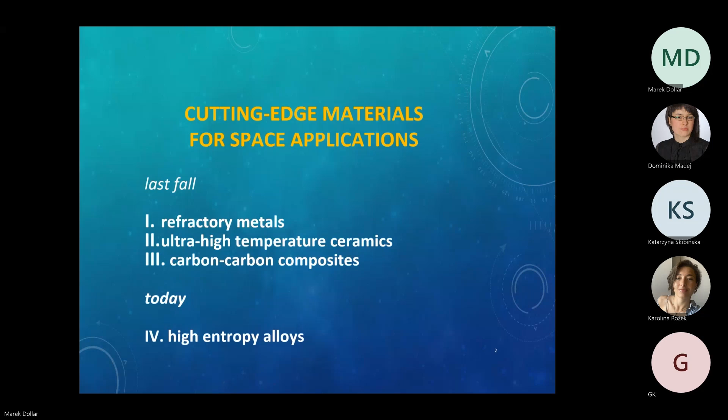Whenever we have discussion on materials, particularly load-bearing materials for structural applications, so structural materials, in the context of aerospace and strictly space applications, we always have to remind ourselves of the king of the field. These are so-called nickel-based superalloys.

It is really a gold standard of aerospace, not just space, of aerospace materials, without which we wouldn't have jet engines. There is no other class of materials that could compete today in major applications for jet engines, for rocket engines. Actually, we wouldn't be in space, literally.

The very well established class of materials, optimized over the last 4 decades, is a baseline for our consideration of materials that are needed, because even nickel-based superalloys. This is the only class of alloys that we call superalloys. So again, it's a baseline for the consideration. All other materials have been designed, or are being designed with the demands in space.

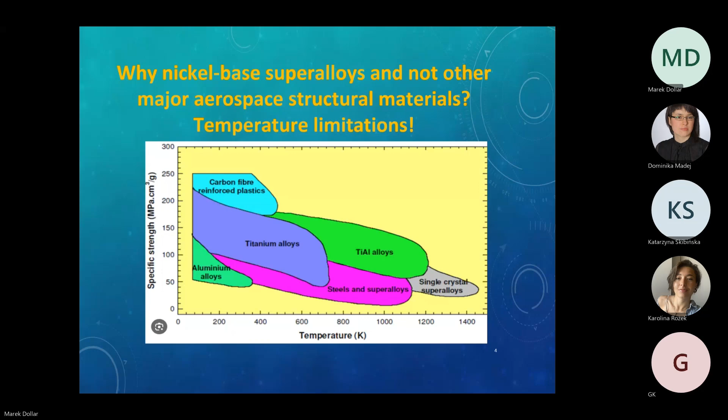Just one slide. I mentioned 1100 degrees C. Nickel-based superalloys in their single crystalline form offer you excellent behavior in the elastic region, so material stiffness, and in plastic deformation, they're strong and ductile. That's the combination that we need for structural materials.

Also, the oxidation resistance is good, and they have particularly excellent creep resistance, which is of major concern. But also the fracture toughness is great, and fatigue resistance is good. So again, this is the starting point. This is what we need at 1100 degrees C. But last fall, I already talked about the three categories I listed at the beginning. Refractory metals, ultra-high temperature ceramics.

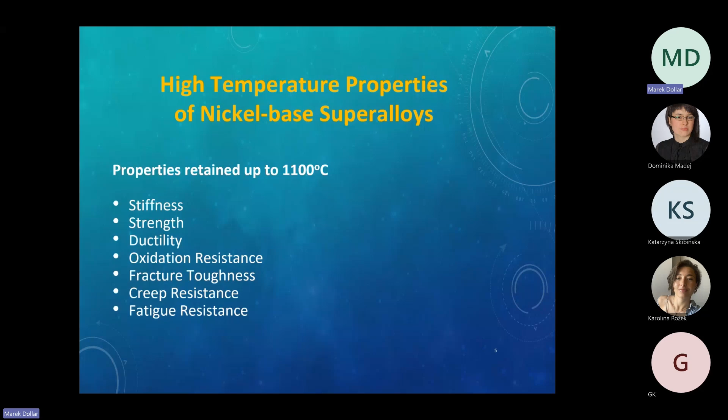These are the classes of materials that are either already helping or will be helping in the future. So keep these properties in mind, and the temperature, as an introduction to high entropy alloys.

Now, looking at high entropy alloys, I will be talking about their composition, about atomic structure, but very briefly. I really will focus on core effects related to high entropy alloys. And I will point to differences between, let's call them conventional alloys and compositionally complex alloys, and high entropy alloys are compositionally complex.

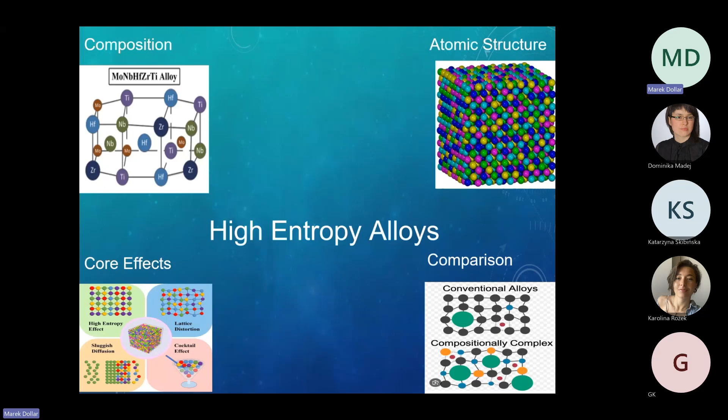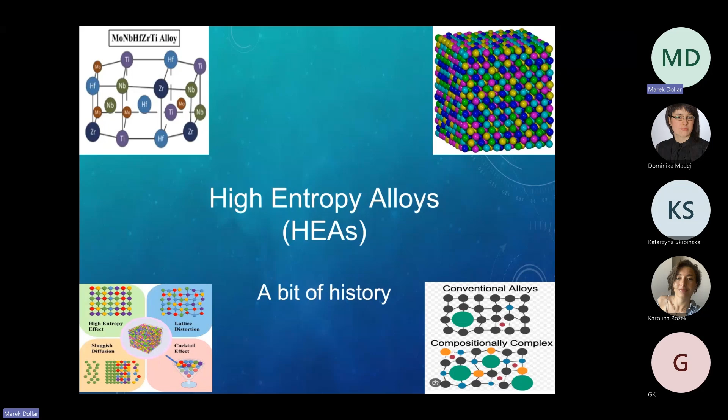Typically, we don't talk about history of alloys, but I think it's worth it in this case, because it's such a unique class of materials, and the way it was developed, for me, is fascinating. So let's start with this aspect, very briefly.

Until I would say 2005, so practically, let's call it 20th century alloys, the well-established alloys we are using today successfully, what dominated was what we sometimes refer to as a one-element paradigm. Altogether, materials designers, people responsible for material selection, material scientists, the bottom line, as far as alloys were concerned, was a simple rule that there is always one dominant element.

For example, iron, nickel, aluminum, and the list goes on, some 20 different elements. Then what you do, you start with a pure metal and add relatively small additions of other elements. Because an alloy, by definition, is a combination of a basic element plus some other additional elements.

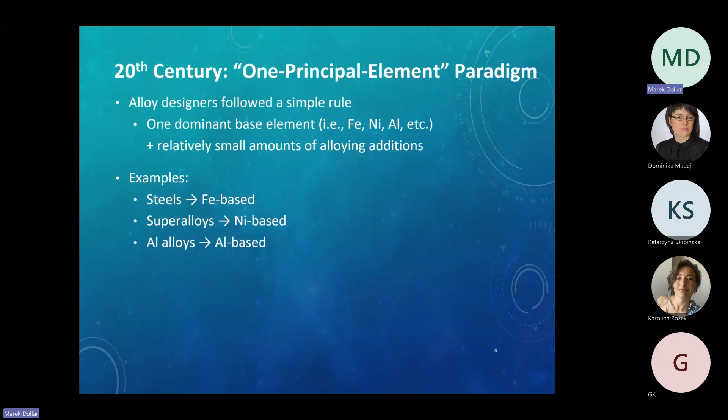A few examples: steels. Steels are alloys of iron and carbon, but of course there are tens of thousands of steels with very different chemical compositions. I mentioned nickel-based superalloys. They are based on nickel, the dominant element. This is the one-element paradigm. Aluminum alloys, yet another example.

And interestingly, I call it the unchallenged implicit assumption. I was at that time part of the game. I never really thought seriously about taking a few elements in nearly equal numbers. It's not that it wouldn't cross our minds, researchers in the field, but we knew it wouldn't work.

No further considerations. Why? Because based on the experience we had, and we still have, when you add elements, very quickly you start reaching the point where the stability of the solid solution structure is a challenge, where inevitably, with a few exceptions, I may mention one of those later on, we produce brittle phases, they precipitate.

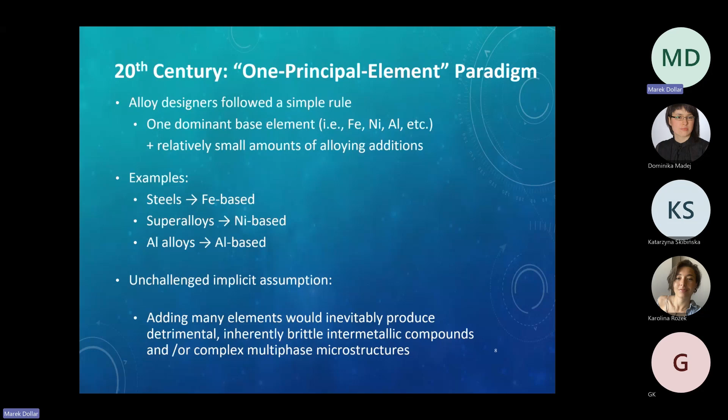So these are particles. And as far as strength is concerned, this is typically a plus. But adding brittle particles, intermetallic compounds, for example, such as nickel aluminum, titanium aluminum, very well-known classes, impacts ductility. And inevitably, the concern is the balance of strength and ductility. That's why pretty much no one talked about multi-element alloys, true multi-element alloys.

This was, in a sense, a breakthrough approach. But the concept behind this, I call it a breakthrough concept, is that these alloys, from a purely thermodynamic standpoint, have to have high mixing entropy. That we've known forever. That's nothing new. Simply the effort did not go in this direction, to truly explore what providing materials with high entropy of mixing atoms really means. From the thermodynamic standpoint, that's pretty obvious, not surprising, but how it impacts materials' properties.

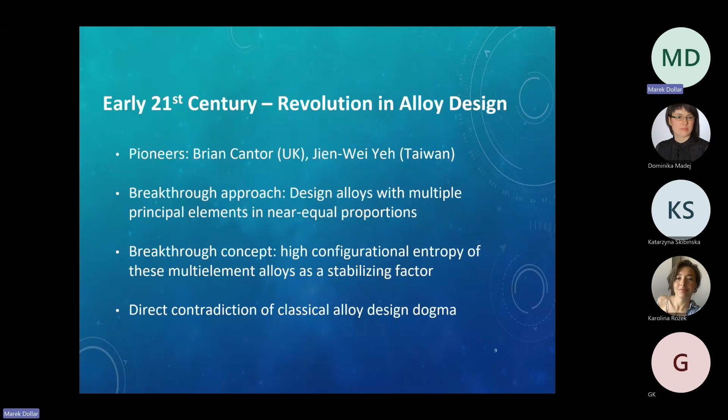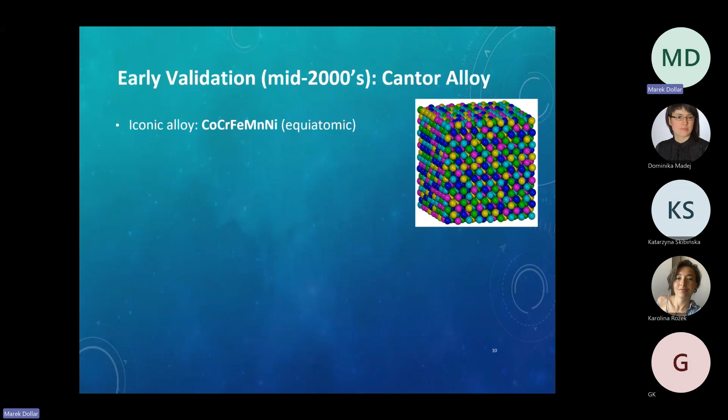It didn't take long. Cantor developed what's today called the Cantor alloy. It's an iconic alloy, if you will. Because whoever touches high entropy alloys, that's the starting point. What he did, he took 5 metallic elements, cobalt, chromium, iron, manganese, and nickel, in practically equiatomic proportions, 20 percent each.

And that's a nice illustration of what the structure of this alloy looks like. It's cubic, face-centered cubic, based on a cube. You see 5 different colors, from yellow to green to dark blue and so on.

Atoms are distributed randomly, but there is some pattern, if you will, because it's 20% of each. And very quickly, first mechanical studies proved that this Cantor alloy has a stable microstructure from temperatures as low as liquid nitrogen temperature to 800, 900 degrees C. That was very interesting, because there is no brittle to ductile transition. Actually, they were looked at as a very promising cryogenic alloy, not as much a high temperature alloy.

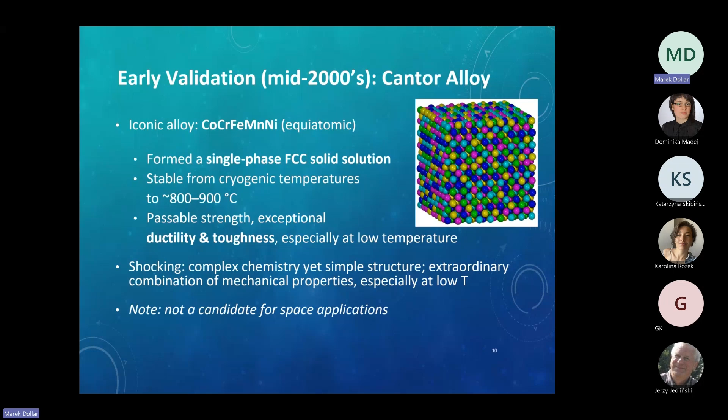Again, no mention of space. This alloy wouldn't even be considered for a second as a space material, because practically above 800, 900 degrees, we wouldn't have any use for this particular high entropy alloy.

Very quickly, around 2010, there was already, and that's fascinating, a pretty good understanding of core effects. Four core effects: high entropy effect, lattice distortion, very slow, sluggish diffusion, and what people refer to as cocktail effects. So a combination of several factors impacting properties.

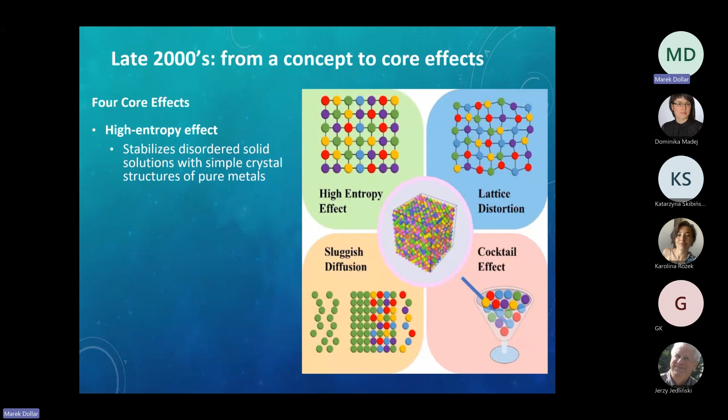Now, high entropy effect. The high entropy of mixing resulting from the presence of 5 major elements stabilizes what we call disordered solid solutions. I will show you an example in just a moment, with very simple crystal structure, equivalent to single metal structures or pure metal structures.

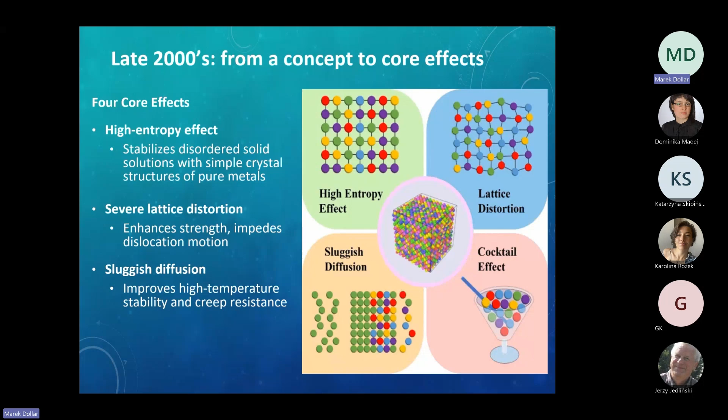By having elements with different atomic sizes, we have severe lattice distortions. There is an enhancement of strength, but at the same time, it slows down dislocation motion, which is responsible for plasticity, for ductility. Sluggish diffusion: because of different sizes, vacancies, or atoms, you can use the terminology in parallel, move much slower than in conventional alloys.

And this is huge because creep, if there is the biggest concern for high temperature applications, it is the creep resistance of the alloys. And the sluggish diffusion contributes to this. Cocktail effect: there are some first studies related to this effect, but the point is it's kind of a non-linear enhancement of properties.

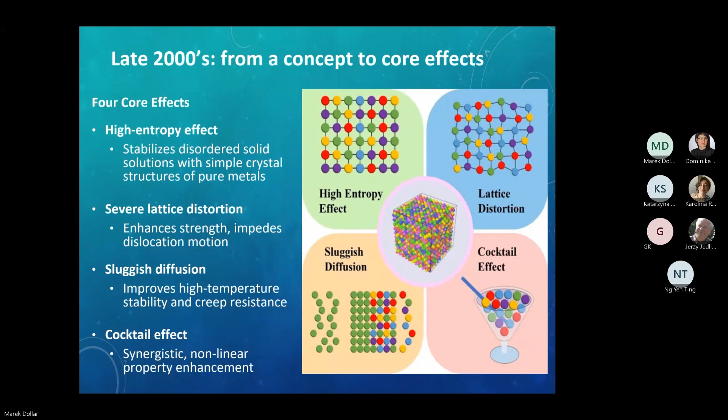I mentioned the crystal structures. We have 14 Bravais lattices; metals crystallize in the simplest lattices: body centered cubic, atoms at the corners and 1 atom inside; face centered cubic, atoms at the corners and atoms at the center of the faces; and hexagonal. When you see the list of alloys, there are like a dozen or so. These are the bases for practically all structural alloys in use. They're all the usual suspects when you look at the list of elements.

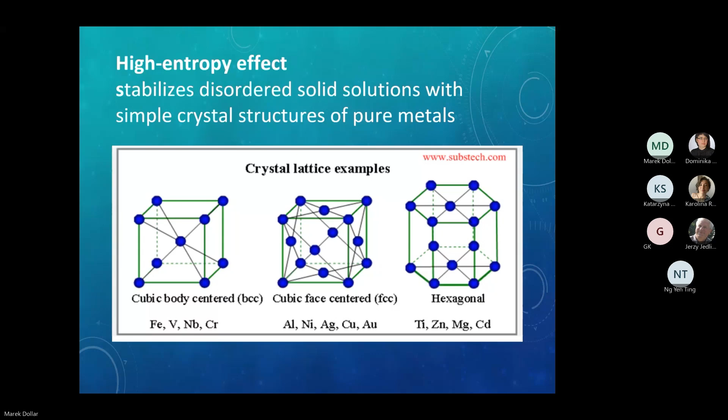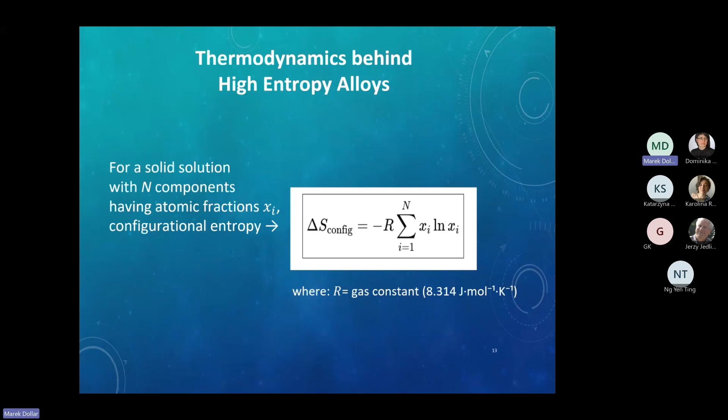Now, just 2 slides. Thermodynamics behind high entropy alloys. You have n components; in the Cantor alloy's case, it is 5. All of them have sometimes different, sometimes the same atomic fractions. You calculate the configurational entropy, finding the products of the 2 terms, summing them up from 1 to n, multiplying by the universal gas constant with the minus sign. In an equiatomic alloy, for example the Cantor alloy, 20% of each element, xi equals 1 over n, n is 5, so 1/5. And you get the entropy of mixing from this simple equation.

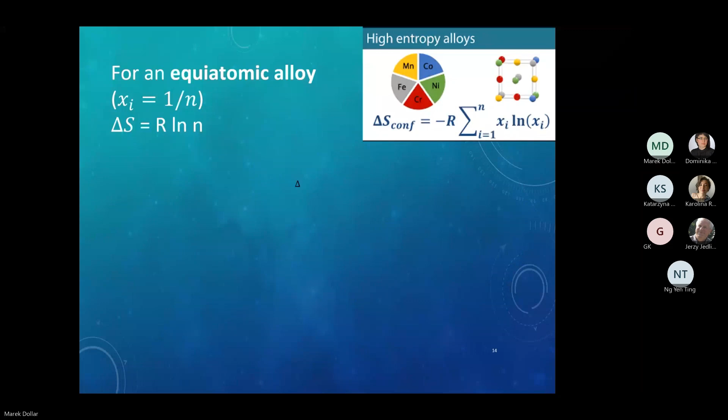Now, how does the number of elements impact entropy of mixing? By definition, in a pure metal, there is no entropy of mixing. We are not mixing atoms of the same substance. For 2, it increases to close to 6 joules per mole times Kelvin, and it goes up. A typical high entropy alloy has entropy in the range of 10 to 20, let's say, but that's calculated based on the assumption that the number is exactly the same.

And this is what we are talking about: 5 elements, practically all. There are some 4-element high entropy alloys, but for practically all, we have 5 elements. This entropy of mixing is high enough to secure what we expect of high entropy alloys.

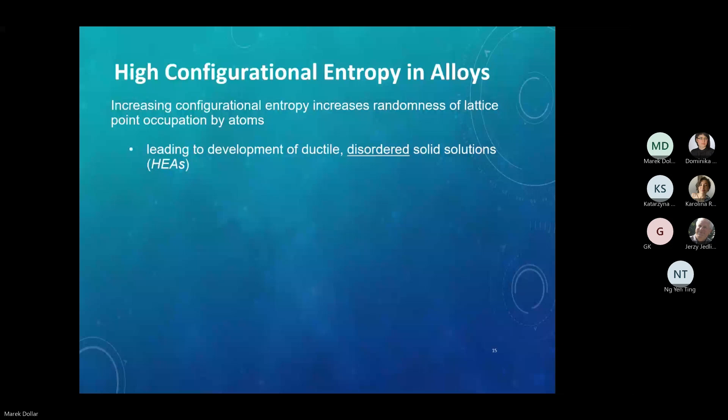Now, when you mix atoms, you increase the randomness of lattice points occupied by different atoms. That's where the entropy comes from. And altogether, under these circumstances, we produce very ductile, disordered solid solutions. That's the illustration. You have just 2, in this case, red and black atoms. And this is a disordered structure, so there is a random distribution of atoms in individual lattice points.

Here you can see some order. This is actually, for 2 elements, intermetallic compounds, yet another interesting class of materials, but I don't have time to talk about it. It was listed on my mega plot; I showed titanium aluminides. This is how the structure would look, but they are ordered. And ordering, in the case of structural applications of the type we're talking about, is disadvantageous.

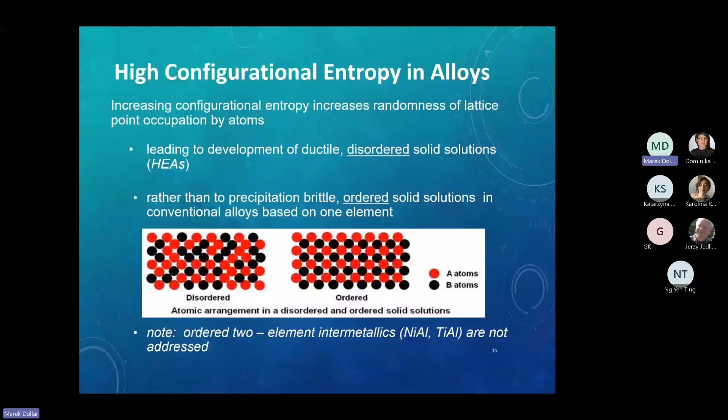Yeah, I just mentioned that nickel aluminum and titanium aluminum is not something we would be concerned about today. Now, going back to the free energy of mixing, look at this product. We have 2 ways of minimizing energy, which of course is an inevitable nature intention, if you will. You can do the following things to increase entropy, which minimizes energy. Either you increase the configurational delta S, or you increase temperature.

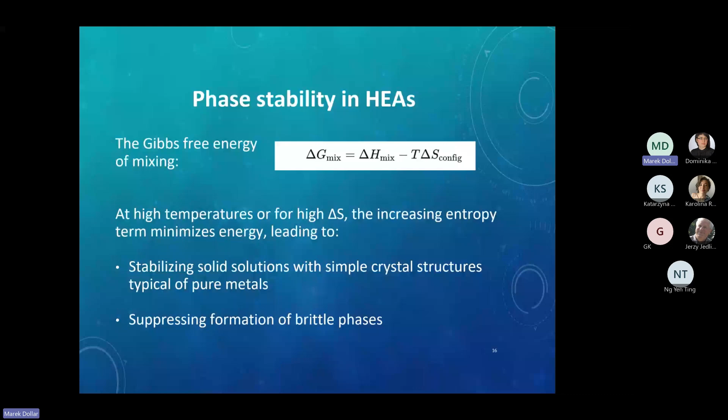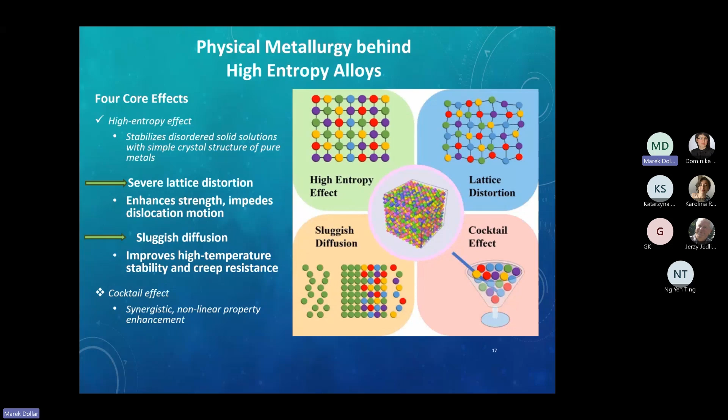Lattice distortion. That's the simplest. That's a body centered cubic structure in the presence of 1 type of atom. But here you see 5 types of atoms of different sizes. Immediately you see that the cube, the ideal cube, is completely distorted. And this is an idealization, because the distortions are sometimes, because of the atomic size differences, even more so than here.

What kind of impact does it have on motion of dislocation, this line defect? When millions of dislocations move, a phenomenon of so-called slip takes place, leading to significant plastic deformation. That's, of course, an oversimplification, but I can't spend any more time talking about this. And as a result, what we refer to as the energy landscape changes tremendously. Because if we have one element, essentially, and this dislocation moves, it follows a sine function. It moves from one type of spaces to another in a way requiring very little energy. But that's not what we have here. With each additional element, the presence of the dislocation in proximity to these elements leads to strong local strain fields.

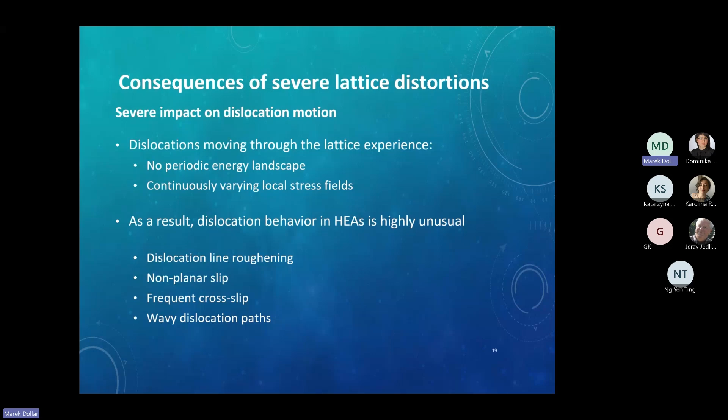That's incredibly complex. So again, on a lighter note, this illustration has so many mistakes that I won't even start. But imagine that this is a simple shape. It doesn't look like this, but it's an illustration. Now look at the dislocation line in high entropy alloy. There are several mistakes. I pushed GPT to apologize for these mistakes, but it didn't help much.

Okay, but you can see this periodic energy landscape in a single element. Dislocation moves and energy changes like this. But when dislocation moves in a multi-element, high entropy alloy, you see what happens. Very different amplitudes, if you will. Frequency is different as well. The bottom line is, I don't know what value this figure has for you, but at the very least it says everything we know in conventional alloys breaks apart in terms of dislocation motion. We don't know how to, of course, people do it. It's a new area.

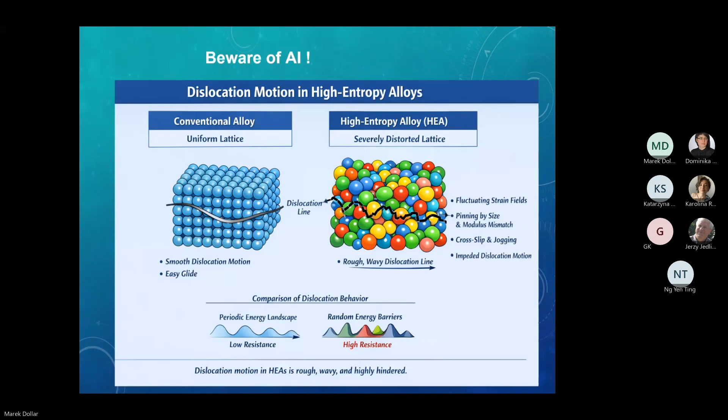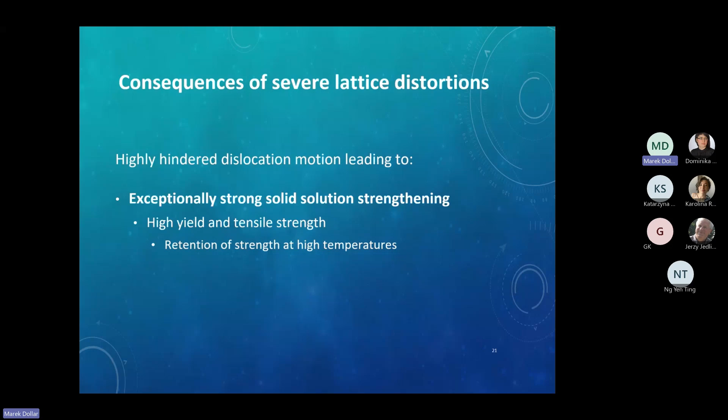What are the consequences of these lattice distortions? Dislocation motion is far more difficult, and we provide the stability of the solid solution structure. The solid solutions are strengthened. It leads to high yield and tensile strengths, but more importantly, as a prospective feature, the retention of strength at high temperature, provided the compositional structure is properly selected.

Why is the strengthening so pronounced? When you look at conventional alloys, let's say you have an alloy made out of black atoms. One of the ways of making them stronger is using so-called interstitial atoms, in between other atoms. That's why you call them interstitial, but also substitutional atoms, which means that we are substituting an original atom with another one. And these substitutional atoms can be bigger or smaller. Now, that's pretty much it. And it's an important strengthening mechanism.

But in compositionally complex alloys, we have a plethora of possibilities, because we have 5 types of atoms. And the position of interstitial atoms, the size differences are far more pronounced. That's why, from this standpoint, I look at this and say it has to be much stronger.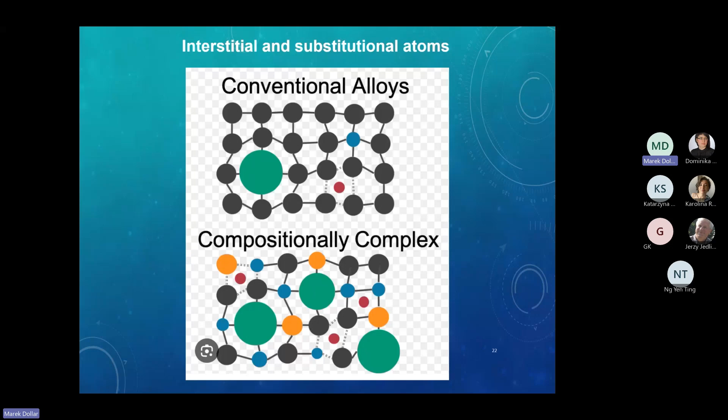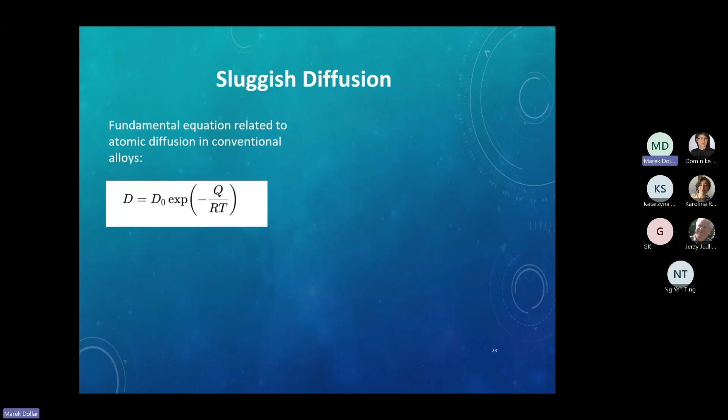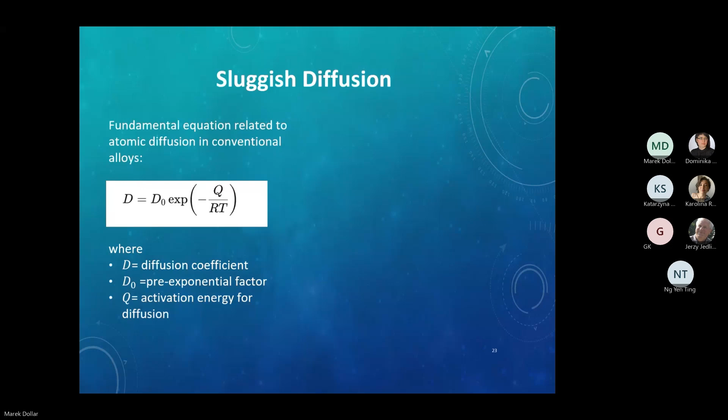Now, slow diffusion, very quickly. Look at the equation describing how fast vacancies or atoms move through vacant sites. That's a classical equation. Whenever we teach diffusion, that's where we start. D stands for diffusion coefficient, the material's property. D0 is a factor, different for different materials. Most important is the activation energy for diffusion, Q.

Now, why in high entropy alloys is atomic diffusion slowed down in a significant way? You look at this equation. In high entropy alloys, the activation energy for diffusion is much higher. If it is the case, we have lower diffusion coefficients D, and the diffusion coefficient is essentially the material's property that controls how fast vacancies diffuse. It relates to creep, again, arguably the most challenging aspect of structural applications in space.

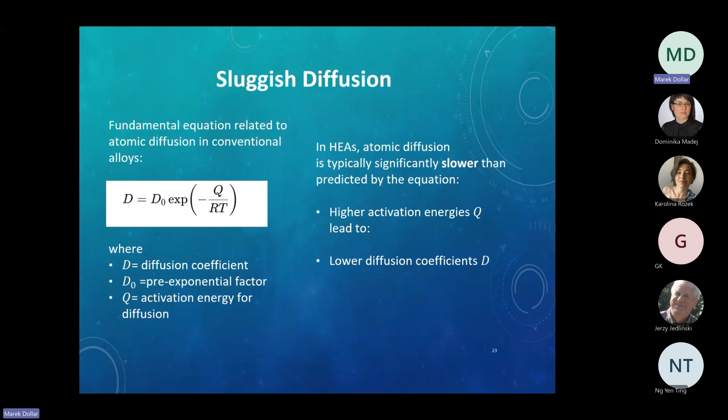The physics behind this: vacancy mobility. Vacancies moving is a theoretical concept. Empty spaces don't move; atoms move from one empty space in the crystal lattice. But we tend to talk about vacancy as a construct. They interact with 5 different types of elements. And the very existence of different elements introduces strain fields, changes them and the distance between differing atoms. That's a complicating factor. And the migration is slow.

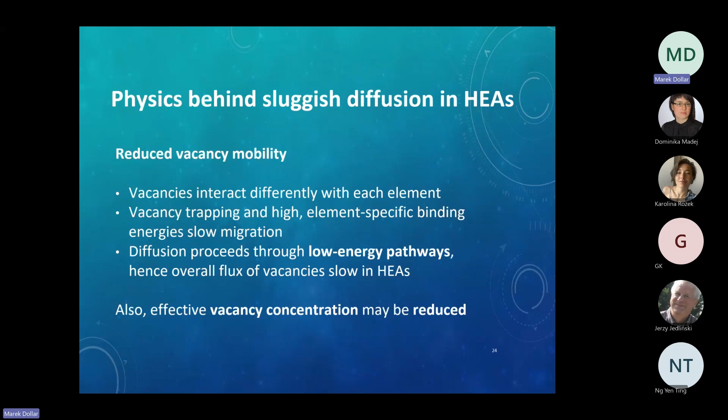And since diffusion proceeds through low energy pathways, these pathways are very complicated, like dislocation motion becoming more complicated. All of this slows down diffusion. This hasn't been proven yet, but there is a strong indication that the vacancy concentration in these alloys, the equilibrium concentration, is reduced. What would it mean? Again, this is an active research area. If we have fewer vacant sites, the diffusion slows down. It's an additional factor.

Improved creep resistance in high entropy alloys is promising. Enhanced thermal stability. And even if additional phases ultimately emerge, they are created as a result of diffusing atoms. If diffusion is slowed down, the probability, the inevitability if you will, of their formation is slowed down. And better radiation tolerance might potentially have beneficial effects in space.

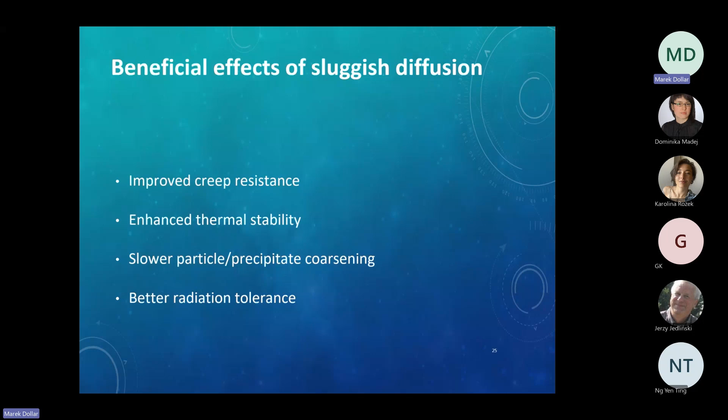Now, I told you about the Cantor alloy. Since around 2015 to 16, there has been further acceleration of research in these areas, and three major families of these high entropy alloys emerged. The Cantor alloy is an example of a face-centered cubic alloy. So that's one category. Another allows for additional phases despite their detrimental effect. But the third one of interest to us are refractory high entropy alloys with body-centered cubic structures. Because they use high melting point elements, these alloys are of concern to us regarding applicability in space.

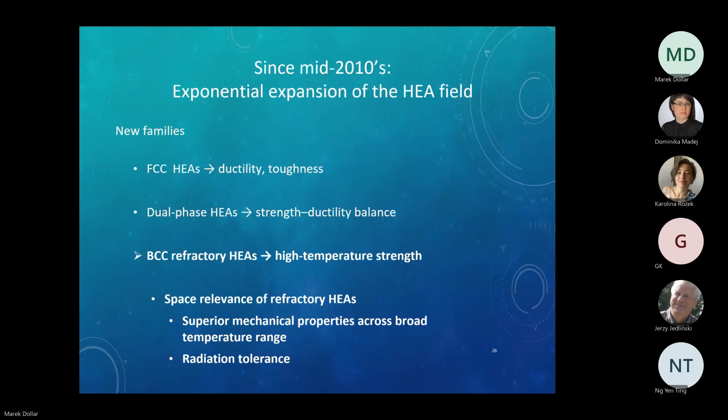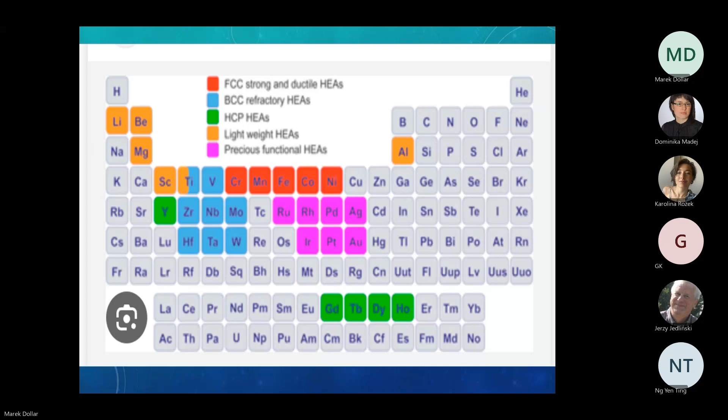Looking at these elements again, I am sharing with you the two most prominent ones at this point of time. One has four elements: niobium, molybdenum, tantalum, tungsten. Another one, probably the most popular one at this point, has vanadium, niobium, molybdenum, tantalum, tungsten. They have already proven in laboratory tests their ultra-high temperature strength and creep resistance. So their potential is there, but we face several challenges. Oxidation resistance.

We are using heavy elements. Tungsten's density, comparable to rhenium, is practically 20 grams per cubic centimeter, the heaviest metal. So density is high. As a result, specific strength, strength per density, is relatively low, which has a huge impact on the weight of structures, parts, components that will hopefully be produced using high entropy alloys.

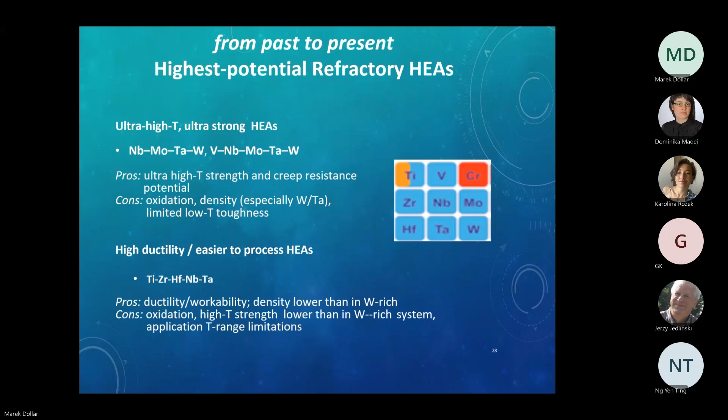Okay, I will skip this. Let's compare properties that we have available now, measured in laboratories, of nickel-based superalloys, mostly properties measured in tension. Because of manufacturability, most of the data you are able to find in literature are for compression, but more and more they are complemented by comparable properties in tension, so tensile properties.

Look at 600 degrees C, you see pretty much the same, no big difference. Likewise, 800 degrees C, these are the ranges. The difference shows up when it comes to strength. YS stands for yield strength at 1000 degrees C. You look at the two ranges and you see a difference in the right-hand column. When you move to 1200 degrees C, it's for all practical purposes near or beyond the practical limit for most nickel-based superalloys. And this is quite a respectable range.

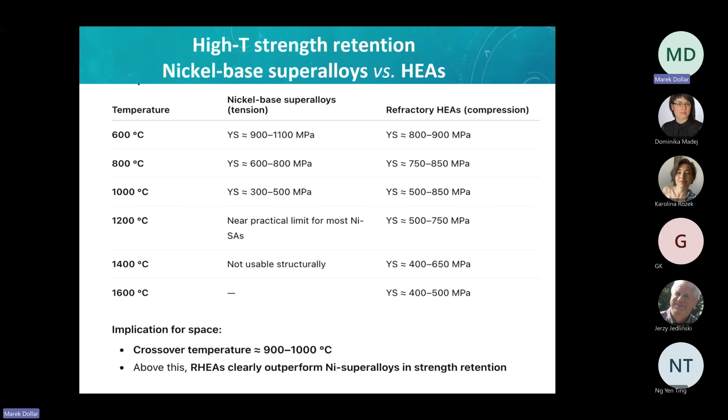So implications for space: this crossover temperature when we are concerned about nickel-based superalloys is around 1000 degrees C, and then the benefits are pretty obvious, or still potential benefits. So refractory high entropy alloys outperform nickel-based superalloys as far as strength retention is concerned.

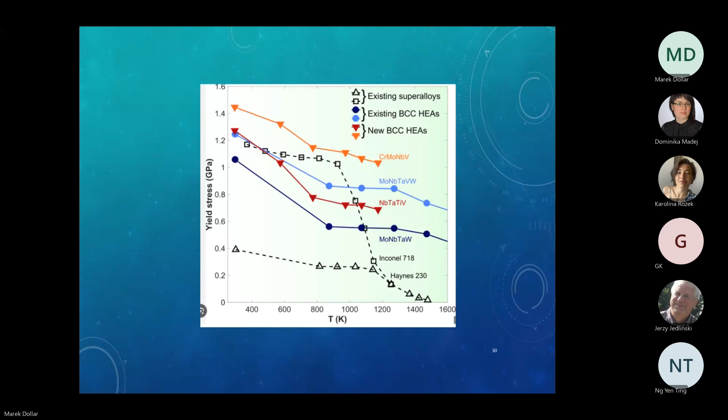As far as creep is concerned, first and foremost, we don't know much about high entropy alloys. We don't have much research yet, but there is an increasing amount of evidence that they perform very well. A summary of somewhat limited data is, one, mechanisms change, but we do know that nickel-based superalloys are limited to 1100 degrees C. And really, the first experimental proofs show that the creep range for high entropy alloys is very promising, above 1100 degrees C, up to 1600 degrees C. But I have to say at the same time, this is a developmental approach. We are not there yet. We hope this will be the case.

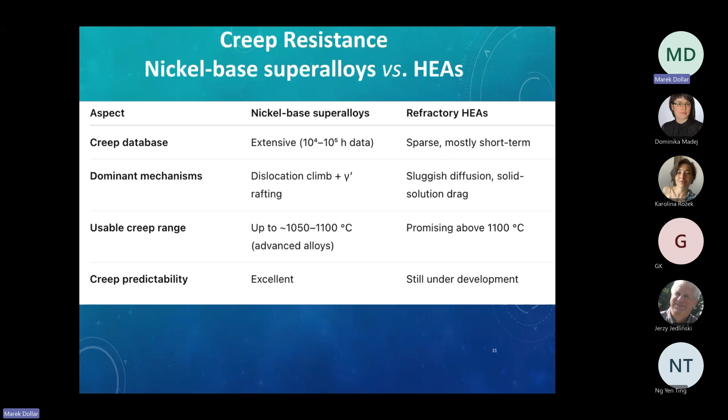Now, that's one of the first well-documented studies on the creep resistance of nickel-based superalloys versus refractory HEAs. The metric is 10 to the minus 6 per second creep, which means every second the material deforms by 1/10,000 of 1%. You have here data at 1000 degrees C for nickel-based superalloys and up to 1400 degrees C. Even if the temperature difference is so pronounced, look how much better refractory metals behave under this particular condition.

The lower the curve, the slower diffusion, the better creep resistance, despite the fact that the temperature difference is so significant. We're talking 2 orders of magnitude, even 3, slower diffusion. So in practical terms, if the creep rupture time in a nickel-based alloy is a matter of months, in high entropy alloys, 2 orders of magnitude, we would be talking tens of years.

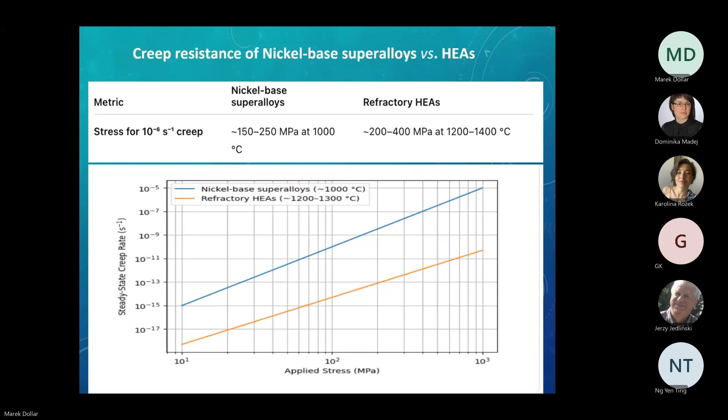Now, practical preferred materials for different types of application. Definitely, for example, in pumps, turbo pump rotors, discs, combustion chambers, hot gas structures, we don't need anything but nickel-based superalloys. But when we are dealing with nozzle throats, through which the gas escapes the engine area, that's a huge problem these days, because the temperatures are above 1200 degrees C.

This is where hopefully refractory materials, with some protection because of the lack of oxidation resistance, may kick in. They are strong candidates for some parts of thermal propulsion, nuclear thermal propulsion applications. It looks like in hypersonic structures, entry loads, this is where I understand that we have some niche applications as of today.

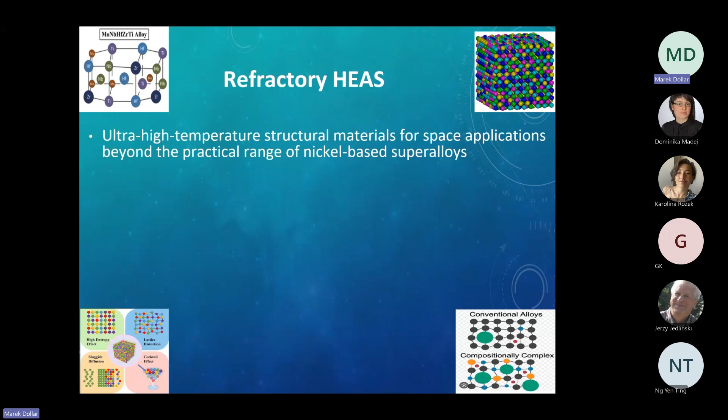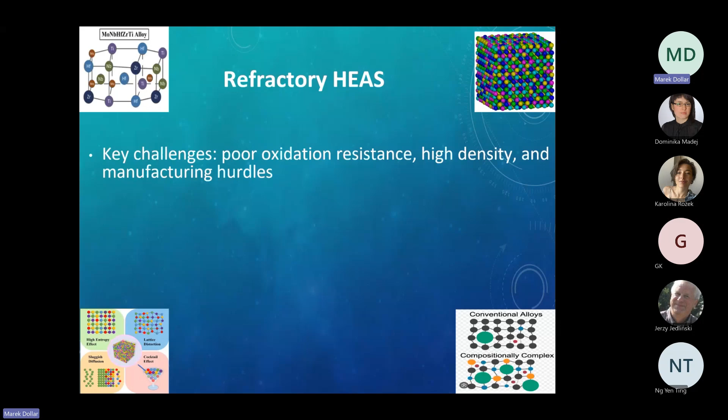So, kind of summarizing ultra-high temperature structural materials, refractory HEA components, and manufacturing: for nickel-based superalloys, the manufacturing techniques are well developed. Nickel kind of lends itself to relatively easy manufacturability. As far as the most recent research right now,

the alloying strategies are through adding light elements like aluminum or relatively light elements like chromium, and actually producing a combination of high entropy alloys, BCC structures, as I told you, plus what we call B2 microstructures. B2 microstructures are typical of so-called intermetallic compounds. There are disadvantages of letting the other phase be present, but there are also advantages. So alloy design is actually optimization, sometimes choosing from bad options the less bad option, if you will.

Also, because of the poor oxidation resistance, a strong area of focus is coating, and the usual suspect, additive manufacturing, to manufacture future high entropy alloys. They've proven high potential, but I have to be very careful here and say they are still considered development materials. But maybe because of this, it's so fascinating to watch the progress in this area.

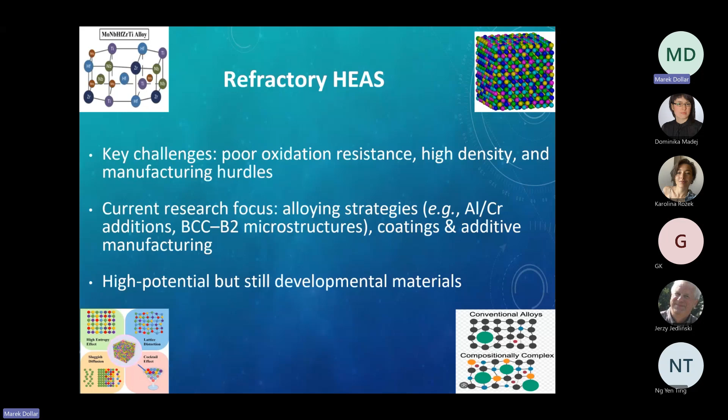I used the same slide during my fall presentation, essentially saying that's the end of my presentation, but it's just the beginning of present and future challenges when it comes to materials used specifically and nearly uniquely for future space applications. That's what I prepared for you.